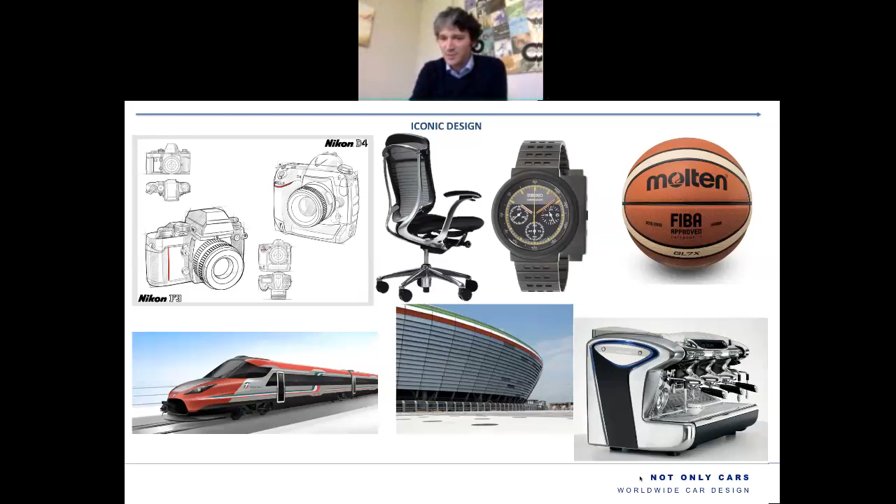So you can see here, starting from the Nikon, which was the first industrial design object Giugiaro worked around, to trains, to watches, to basketballs, to architecture, and to coffee machines. Everything can be styled, everything can be designed. How do we do this? We do this with two companies.

The first one, Giugiaro Architettura, the company I am managing, has two different divisions today. I was telling you about the slow start from a small group of individuals working around architectural projects. Well, then we have to say things got more and more successful. We saw that our projects were quality level projects. They were projects that people liked, projects that the companies working with us were very satisfied with.

So clients came storming to our company, not only for architecture, but many of the industrial design and product design companies we had worked with in the past, and even new ones, still wanted to have Giorgetto Giugiaro, Fabrizio Giugiaro, maybe our group, myself, with them again. So in 2015, we refounded a division of industrial design. And within the division of industrial design, we created an important subdivision taking transportation design, which today is one of our core businesses.

So let's say that Giugiaro Architettura, with its team of architecture, follows all the steps in architectural projects. It follows all the design phases in industrial design and transportation projects. But it is inevitable that the DNA of the Giugiaro family still lies also in car design. So in 2015, the Giugiaro family decided to create a small company, today controlled by Giugiaro Architettura, called GFG Style. GFG Style is the car design company of the Giugiaros.

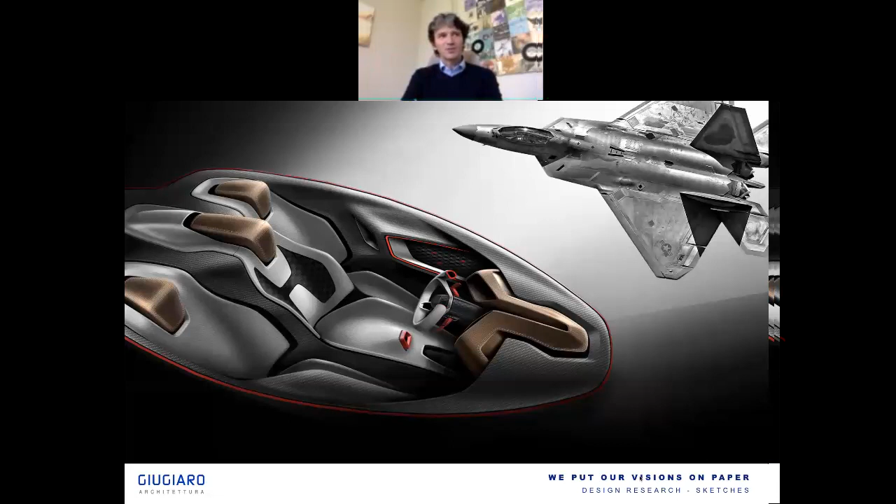What we always do, and this is something that designers always need to focus on, we try to put our visions on paper. So designers are creative, they are mindful, they are visionaries, they are dreamers, but those visions always need to be put on paper. How do we do this? With sketches. All of you have done this before, but the sketching part is always the way of giving a first life to your visions.

Now, this, for example, is the interior of a 3-seat car, which was somehow inspired by fighter jets. This is a sketch of one of our designers. And what we do, and this you'll see in my presentation, is something that I consider vital. My role inside the company is that of making sure that the company is going well. This for me means having the client satisfied. It means selling our services continuously and giving our company that continuous quality that our clients require.

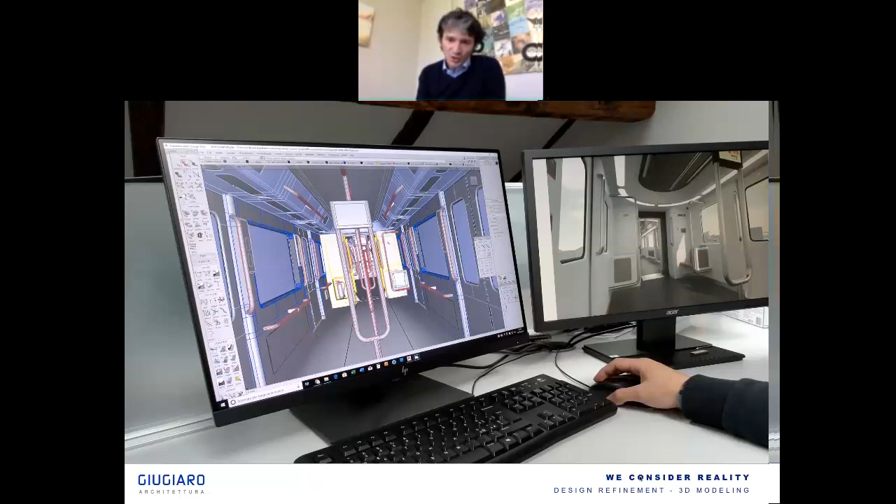How do we do this? Yes, we have to be creative, but we need to consider reality. So all of you, I imagine, are learning how to work with 3D modeling. 3D modeling today is very, very important when you work with companies because it gives you, let me say, the certification of your visions. So with a 3D, you manage to help your clients make sure that what you are giving them is real. What you are giving them is feasible. What you are giving them is going to put them in the condition of doing something that will work.

So this is what we do. We always say feasible creativity, and I would also like to say creative feasibility. So what you do with your design services, with your sketching, and then your 3D, as we said, needs to be creative. It needs to be feasible. It's vital.

I always say that it's vital for design to be working around constraints. The more constraints your clients give you, the more difficult, the more challenging it's going to be. And if you manage to create a great design working around the constraints that you have, then you're very probably going to be successful.

We study every detail. It's very important also when you are working with other teams, other groups. And then one thing, at least this has always been a way of working that Italian companies have had: the milling and the manual modeling is a traditional way of working, which has evolved over the years, but which never has to be lost in my perception.

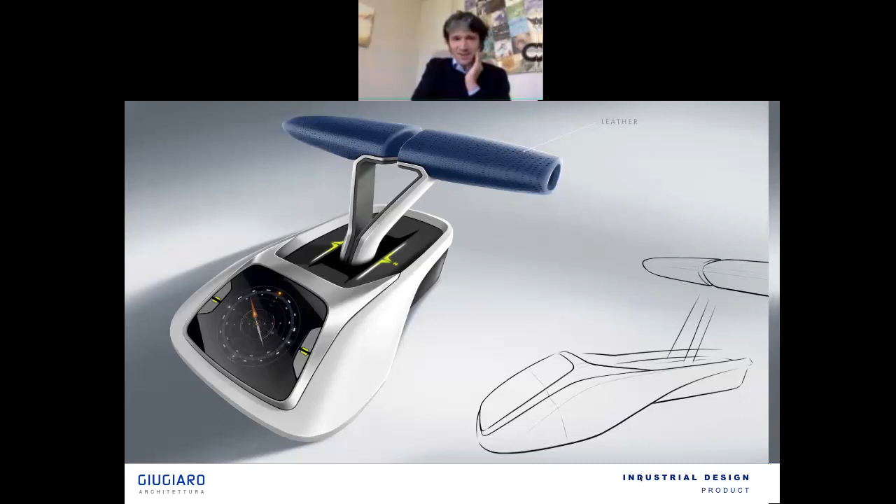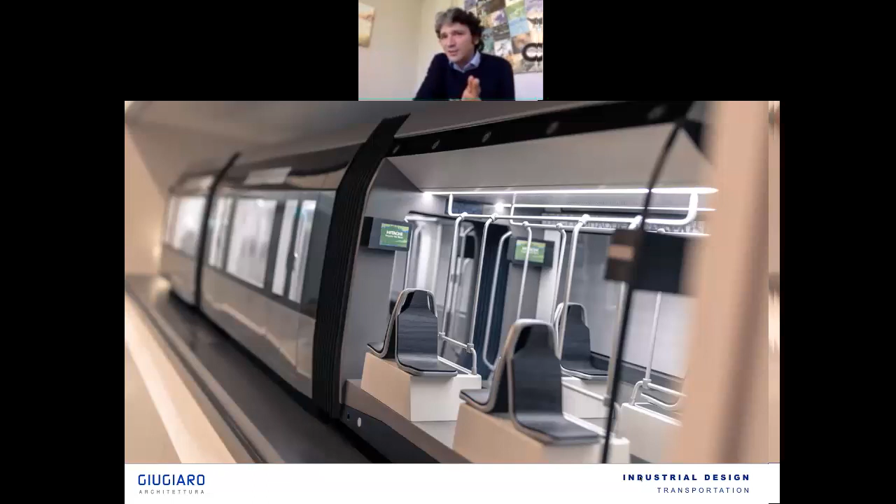This is the tram, one of the recent projects we did for Hitachi, which is one of our main clients. This is the tram for Turin. And this was the model we had done for the initial concept of that tram. This is a 1:8 scale model. But we also developed the 1:1 scale of that tram.

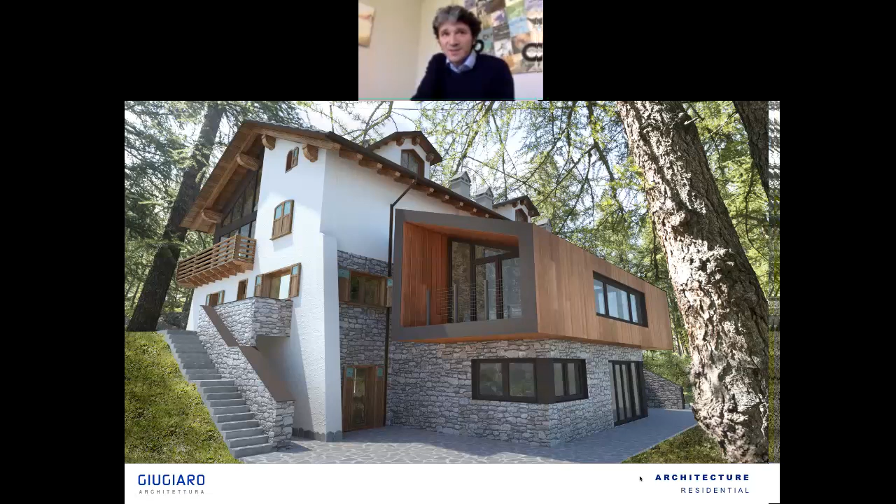This is in Cervinia, with all of the problems of listing, because this was a villa from the 1930s which was listed. So it had a series of protections from the Istituto Belle Arti, the Beaux-Arts of the municipality. But this client wanted, for example, like a binocular in front of the Matterhorn, which is the mountain positioned here. So we had to find a solution to integrate a modern piece of architecture into traditional mountain architecture.

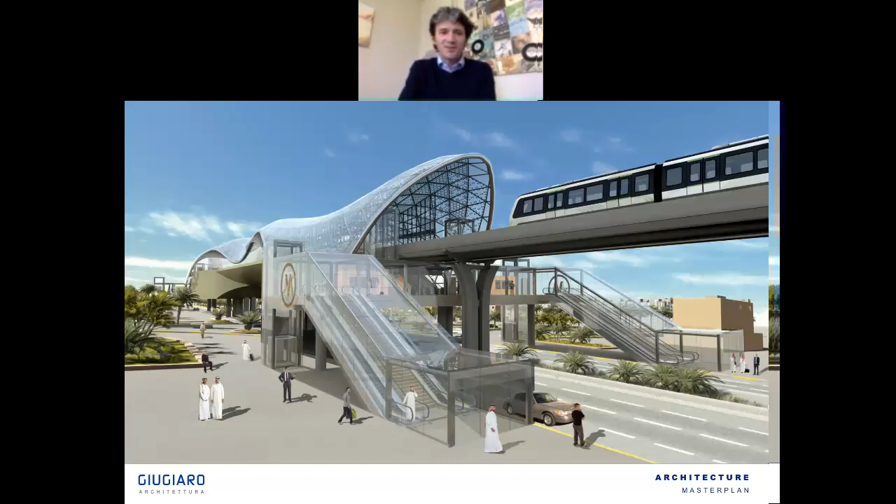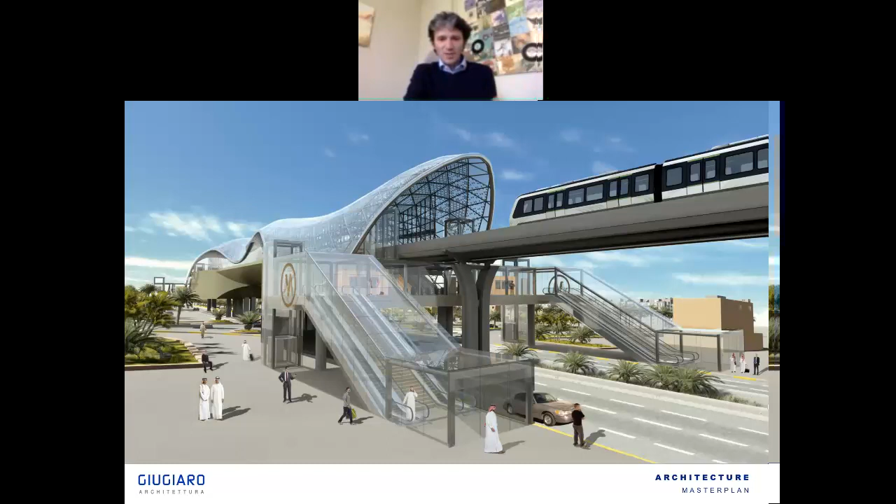And so this is very important, because what you're seeing here, this is a metro station in Riyadh, in Saudi Arabia, built with glass, extremely difficult in that sense. And then what we have here is something developed around the station from Milano, which is totally different, because it's a historic station with a very specific architecture, a beautiful, beautiful piece of work, which had a particular characteristic, that of having the tracks not at ground level.

So what they had is, this was a master plan, because the two streets adjacent to the station, Via Ferrante Aporti and Via Sammartini, have a series of docks belonging to the Italian railroads. And what they wanted was to use these and completely change the characteristic of that area, which today is very degraded. So we built a master plan around this, but it was completely different than what we had to do in Riyadh, in the middle of the desert and of a growing city.

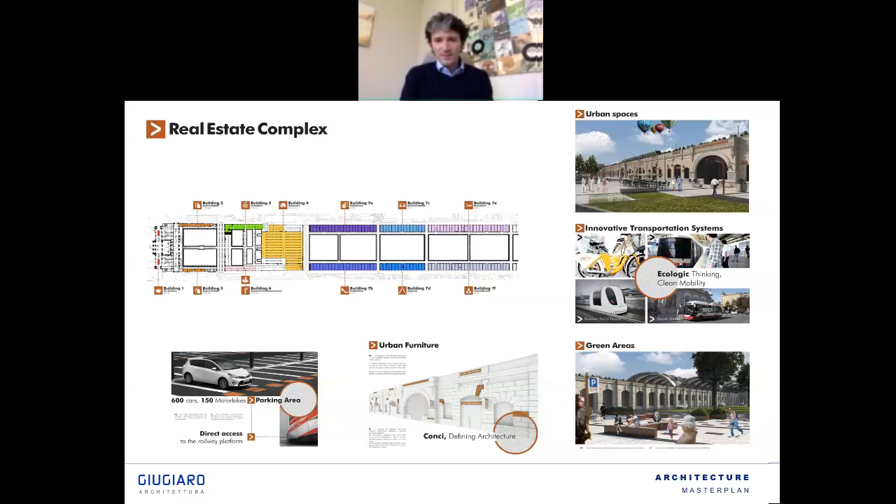And then you have to do something like this. They asked you for shops in what is called the Galleria delle Carrozze, in the Milan Central Station. And they asked you for permanent structures in glass and steel, which was our idea, to integrate and harmonize with the existing architecture. So you see how polyedric you have to be, and then you have to develop a new university, and maybe it will occur to you to be working with an architectural hero who is called Sir Norman Foster, to develop the architecture of the University of Law and Social Sciences here in our city, in Turin.

So wonderful experience. And then once again, you have to work in a train station and design something different for a train lounge. Or you have to work in Russia to develop a catalyst plant in the middle of Siberia. So it has always been our characteristic of being polyedric, of being able to work at 360 degrees on the design and architectural project that a client will come to give us. So honestly, we are very much in a difficult position to reply to questions such as, give it your styling. No, what we will do is we will tailor our styling around your requests. And this is vital to understand for a designer.

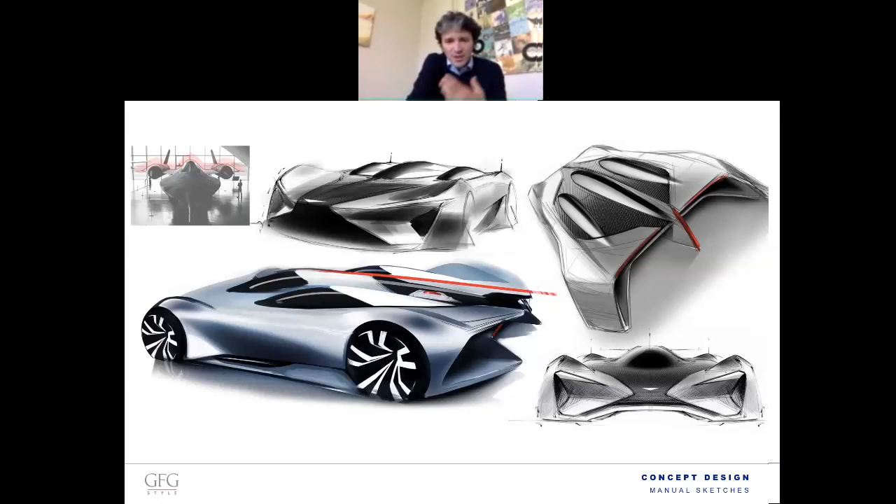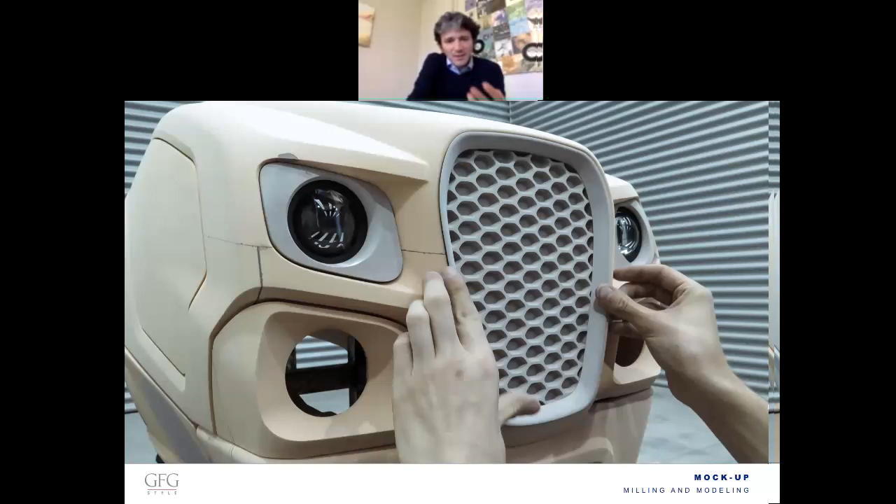These are initial manual sketches of a car, which could give you the ideas. This is how we then transform it into a 3D rendering, with all the styling 3Ds that there are under it. Then we go ahead with modeling; it's always important, as I said, to have something that you can touch. Now, this is a tractor. You see how different it is from this incredible supercar, but we have to do both.

Why does a tractor have to avoid the incredible design services that talents such as all of you can provide? It's very important. And it's very important also for companies, because they will build a marketing case around styling. They will manage to differentiate products which maybe underneath are absolutely the same. And then obviously we're talking about tractors, then yes, the supercar is fascinating.

In terms of GFG Style, we were born in 2015. We have never been very good at promoting our services. One of the things that we always used to do, and it was a tradition from the times we had Italdesign, was to unveil a series of prototypes at the Geneva Auto Show, which is probably for designers the most important event in the world.

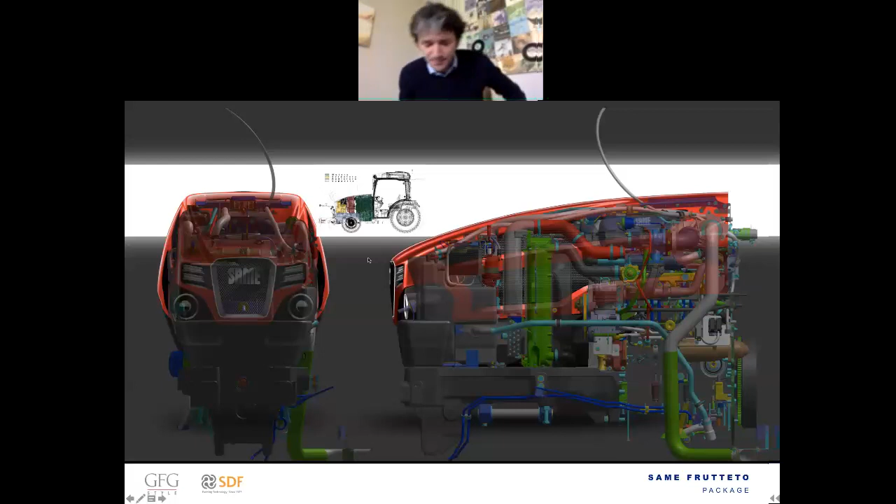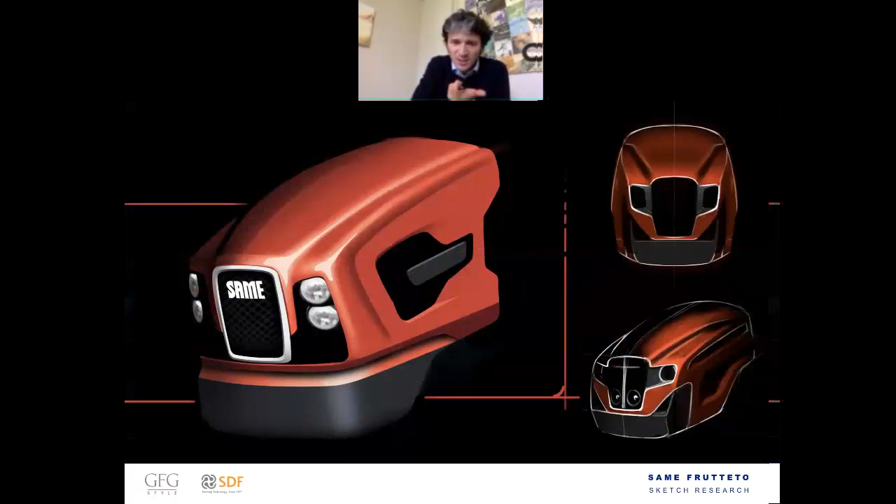So you immediately see that when before I was saying design is working around constraints, this is what I'm saying. If we did all of this and the sketch you were seeing here without knowing what is underneath, then probably we would have given this object a style which then could not be developed. Because remember, Giorgetto Giugiaro always taught me, style is made of details.

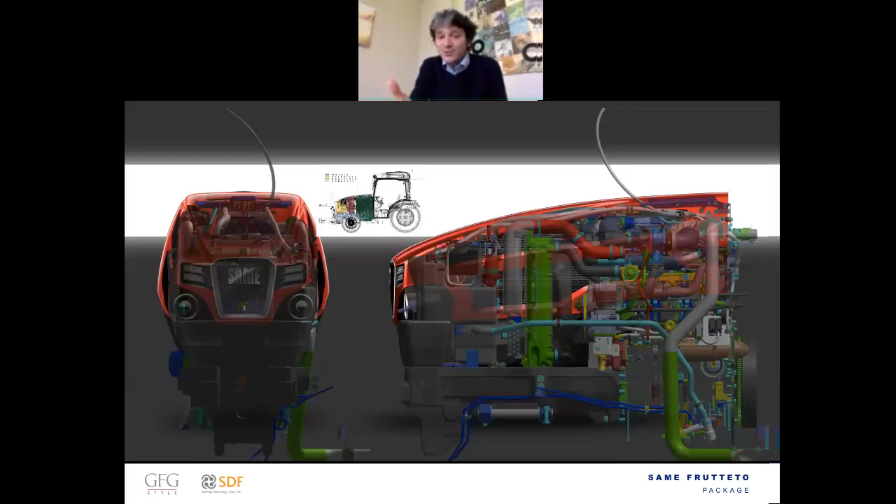We are judged as being more or less beautiful from the distance of our eyes, from some millimeters. I have a big nose. Maybe if I had 2 millimeters less, I would be more good looking, but I have it. And it's those 2 millimeters which make a difference, from the dimensions of our mouth, from the proportions of our body. So a subtle difference gives you a totally different perception of your styling.

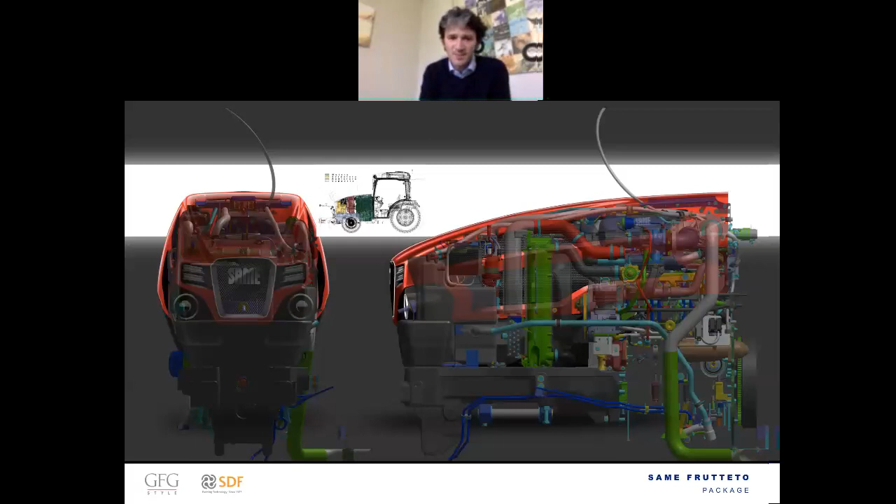What we did is we came out with something like this. So we immediately started developing renderings based on those technical constraints that were given to us. Yes, but other constraints came out. For example, what you see here is a metal grill. That metal grill can only be shaped in a certain way, because otherwise it's not going to be able to follow the shaping that you are giving to it. But not only, the more you model it, the more you shape it, the more it's going to cost. Now, this is an object which needs to have a low cost because they need to sell a lot, and that cost makes a difference.

Now, how about this under part here? Are we going to keep the under part of the old tractor or not? So these decisions need to be made with the company. And if you need to keep that lower part, it is going to influence the design you do on the upper part. So all of these elements will be decided with the company and are the result of a series of analyses such as costs from the company, because their margin is going to be totally different, also based on the work that you designers are going to do.

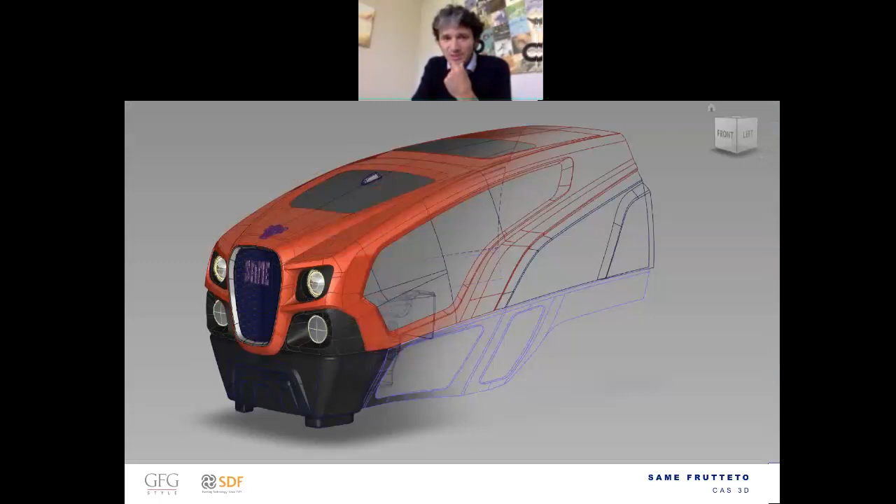As you see, from this sketch to the transposition into 3D, a series of proportions changed. But not only the proportions, a series of parts in the end changed, because with the analysis of that sketch, the engineering department of our client analyzed that probably that part, styled in the way we had styled it, would cost too much. So they would immediately say, just get the part that I had before. And then, you know what happens? You are the designer, so it's your problem to make that part match with the others. And that's what becomes difficult.

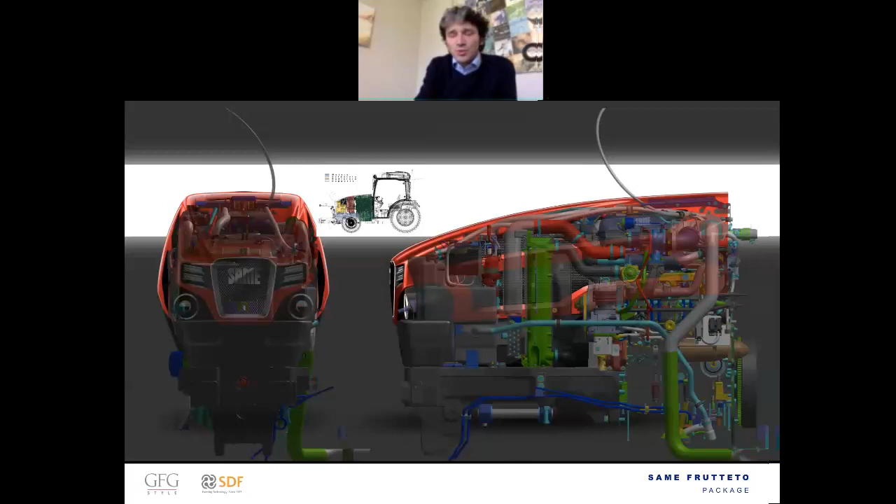So this is where 3D modeling really comes into help, because now you're only seeing a layer of this 3D, but what is underneath is all this. So with this 3D, you're giving the engineers something which they know is going to be working. Then they're going to do thermal tests, all sorts of different tests on that bonnet. But with a 3D, you really get to understand that every point, and I mean every point in space of that styling that you gave, is going to work, and how it's going to work.

Now, what happens is, at that point, a company is going to say, I like it, okay, but I have 3 different brands.

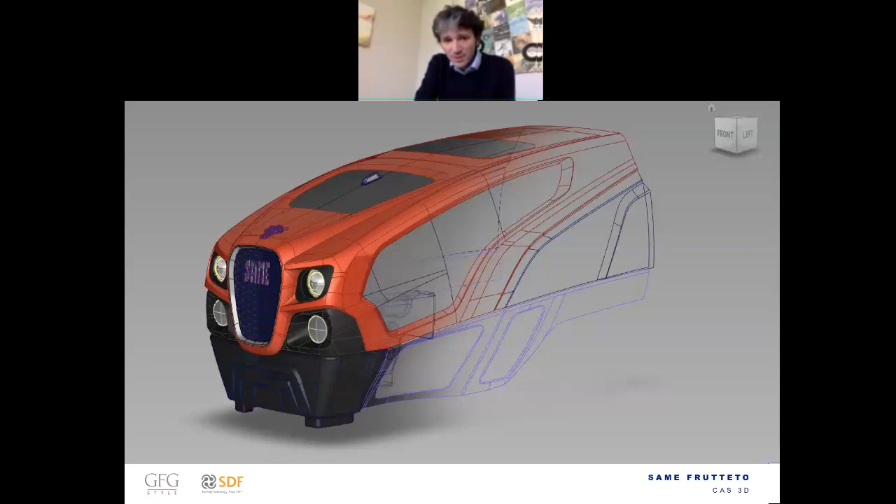I have Same, but I have Lamborghini tractors, and I have Deutz-Fahr. Now, I want to do that same bonnet on the 3 different brands, but it needs to be differentiated, because we need to have the same platform with 3 different aspects and 3 different types of level. And what happens is this. Now, you see that this is a narrow, I was saying, this tractor really needs to go into spaces which are very, very narrow.

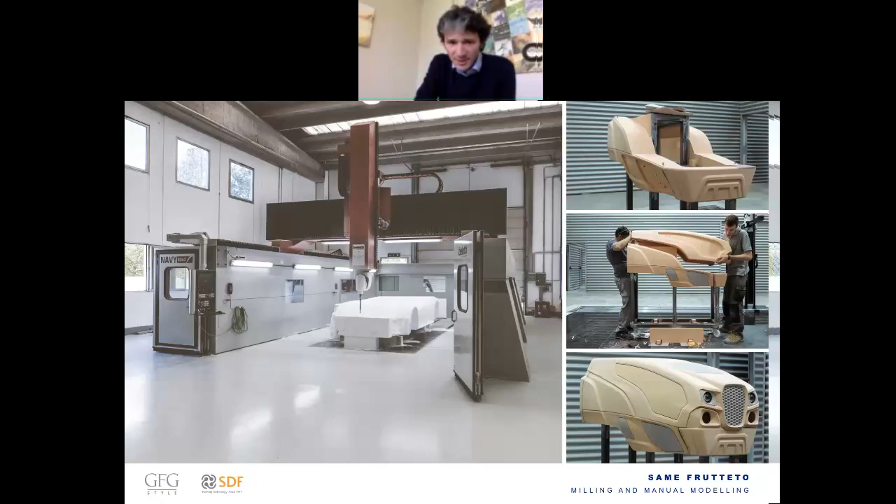How do you verify your styling? Not always only with a monitor, but it's always very important to do the milling. So the milling is essential. Now, in this case, it was a medium density material which we milled. And then you're going to get to paint it, and you're going to get to have a final model which is going to be exactly, style-wise, the vehicle that is going to come out.

And then what happens is you're going to get the most beautiful part of all your job, when your object is going to be unveiled at the show. Because in that case, you see the result of your work. You see the results of your nights thinking about what you can do to make things look nice and to satisfy your client and to satisfy your goals, because then the goals are shared. And this is certainly the most beautiful moment that a designer can have.